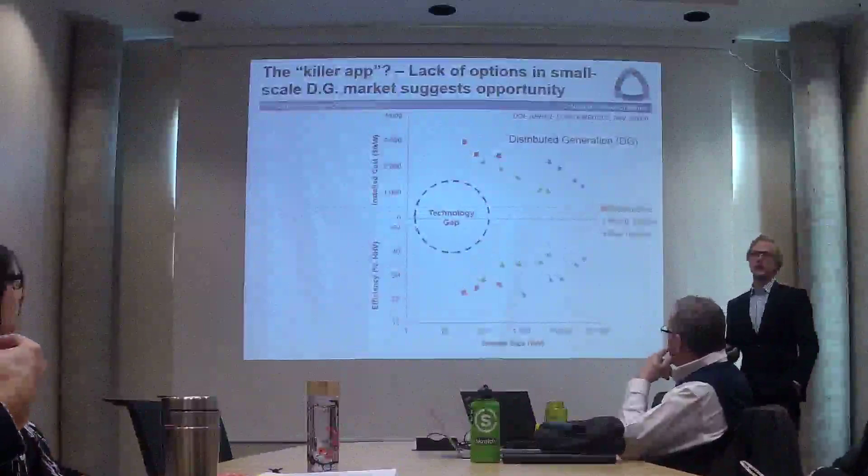So where did it all start? About 3 or 4 years ago, the Department of Energy was trying to fill a technology gap for small-scale distributed generation, meaning small generators from 1 to 25 kilowatts. The problem is there is no cheap generator and there is no efficient generator. So the goal with the protonic ceramic is to really fill that gap with an efficient, 50% efficient, and less than $1,500 per kilowatt generator. That would bring us to our protonic ceramic fuel cell that runs at 500 degrees C, which, for those who know what an SOFC and a PEM are, is somewhere in between - we're trying to take advantages from both low and high temperature fuel cells.

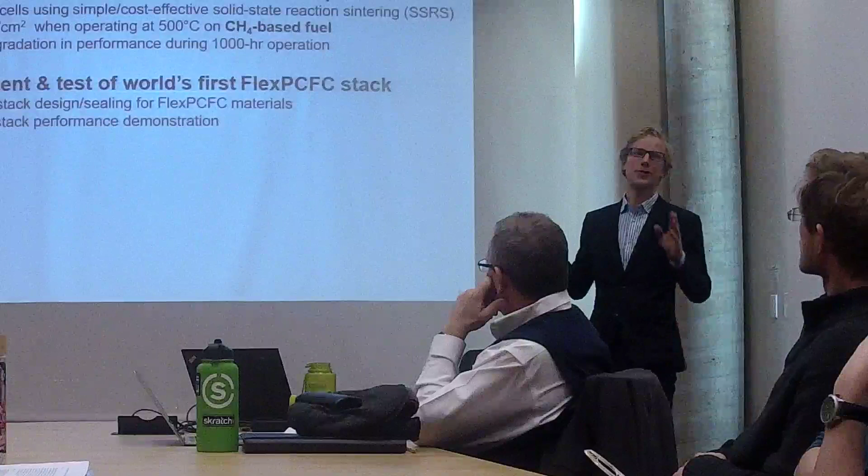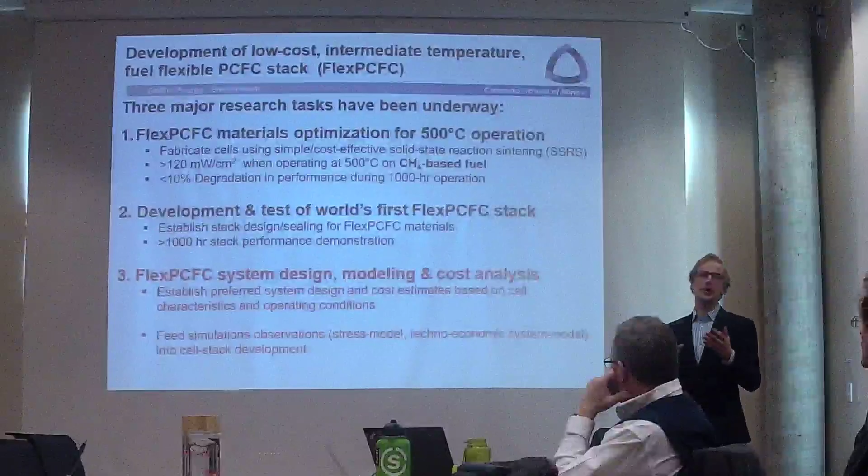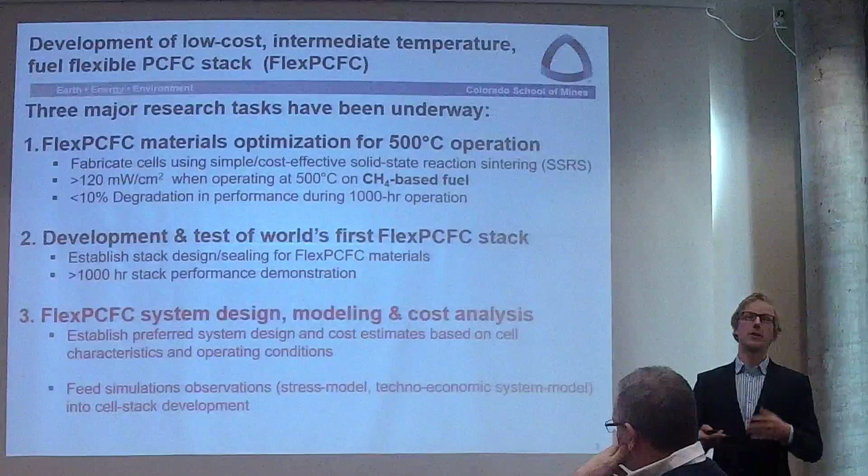The project itself was divided into 3 subgroups. The first task was led by Ryan's group and was looking mostly at optimal quarter-size cells that are as big as a quarter but produce about a watt - can make a small fan turn just by blowing - and putting it into a stack, which was the first PCFC stack made, or so Neil claims. Then the task I was part of, led by Dr. Brown, was mostly the system and fundamental results, going from a button cell scale to an actual kilowatt production system, and then trying to feed the results and observations back into the experimental groups, to guide them in their own research, from the perspective of the customer.

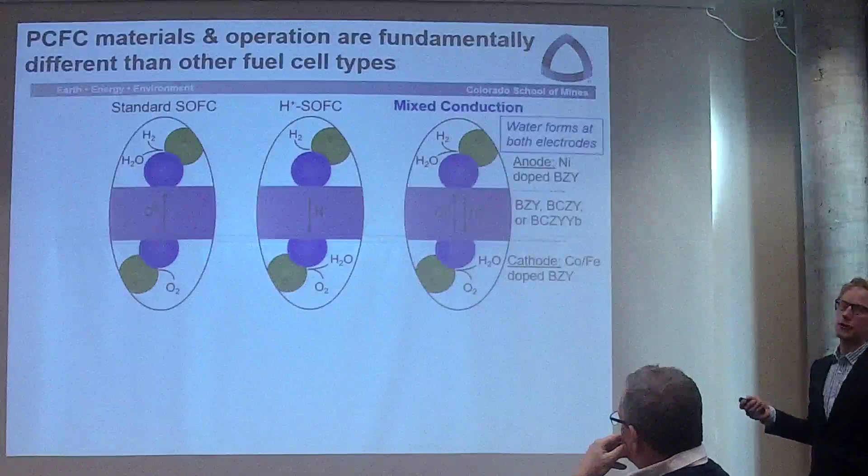For those not familiar with PCFC: protonic ceramic fuel cells use a kind of material that allows conductivity and conduction both of oxide ions, just like a normal SOFC, and also protons, as in a protonic SOFC. So our PCFC is a mixed conducting SOFC and basically conducts both oxide ions and hydrogen protons. Once we go from a button cell towards a channel, you see on the top side we have fuel going in, and then air at the bottom.

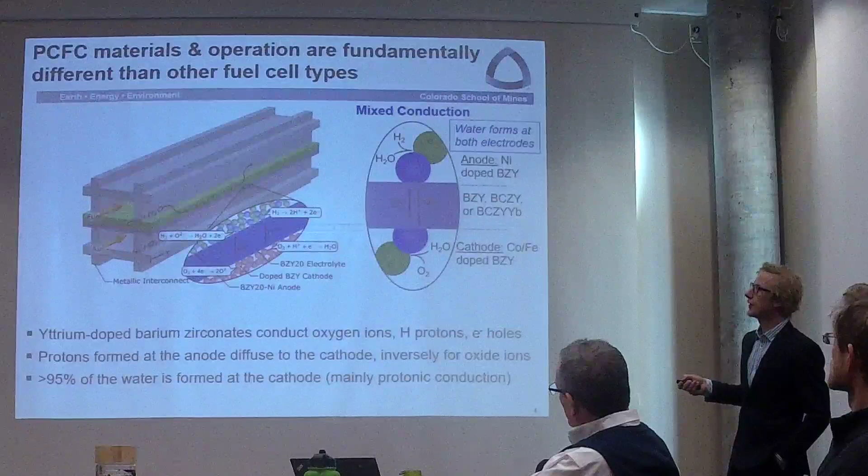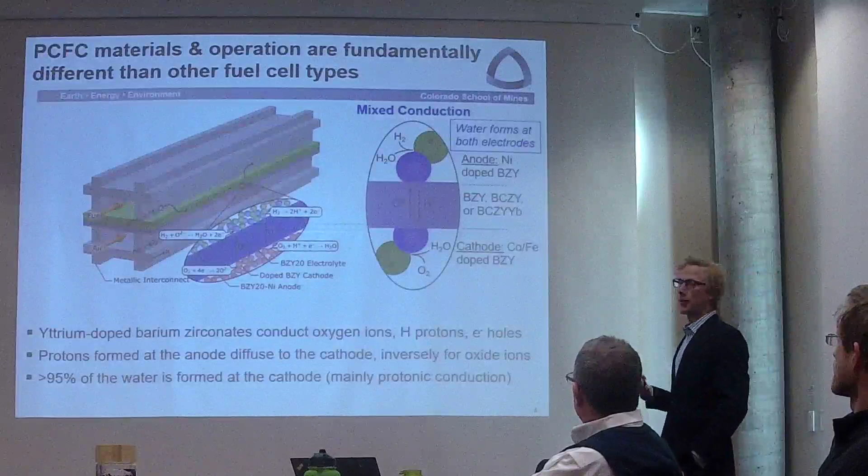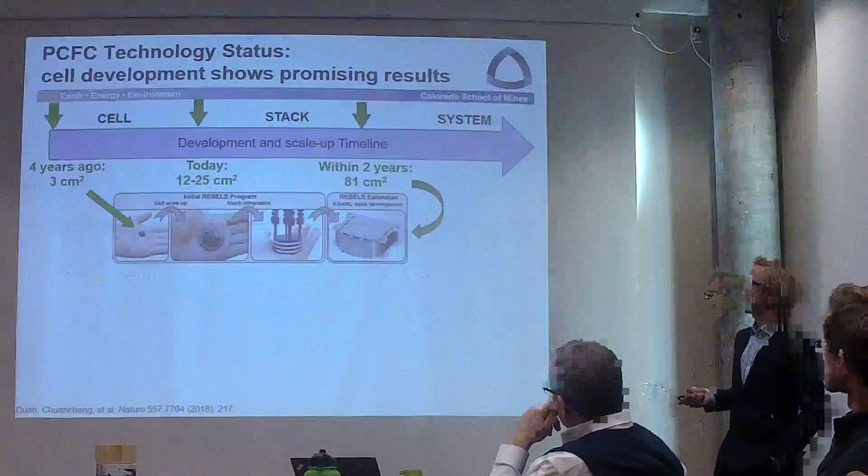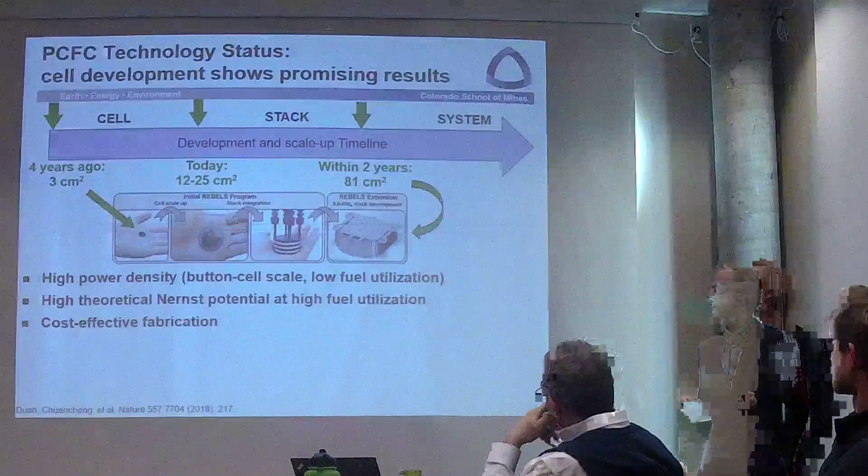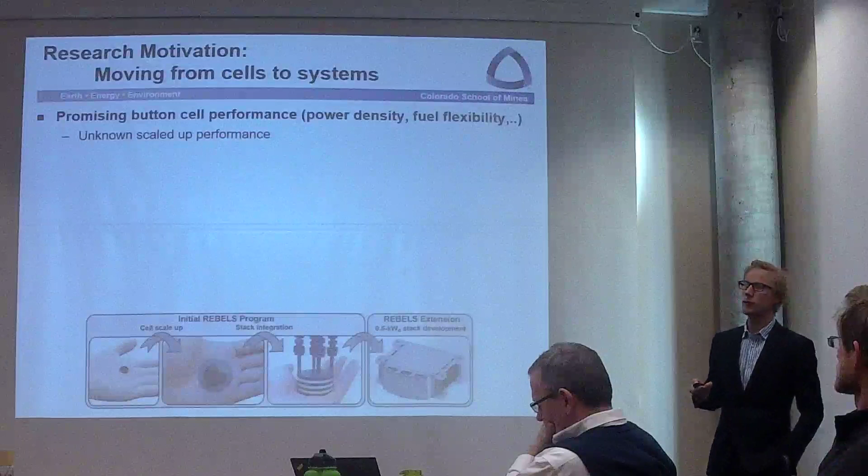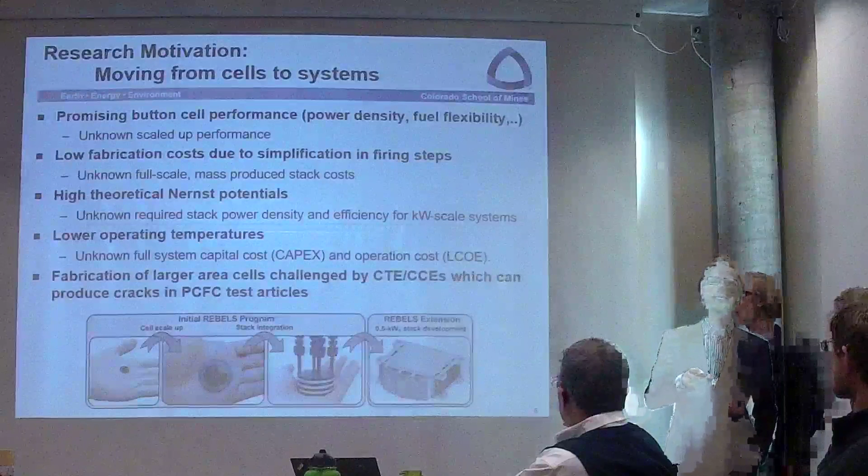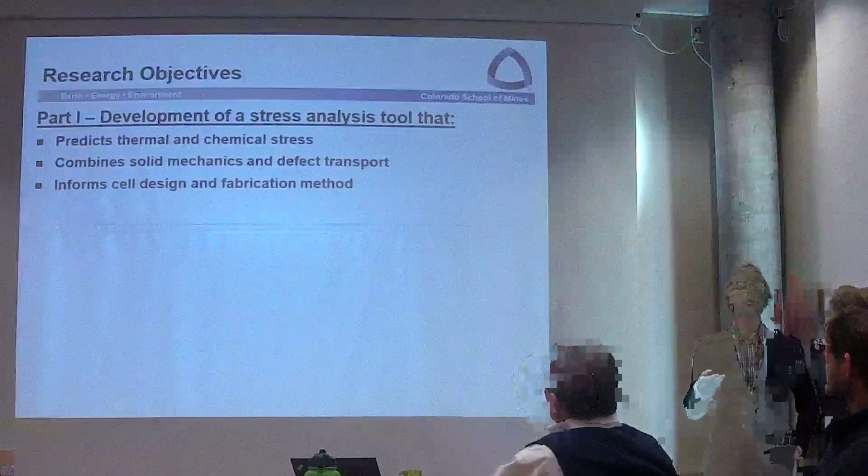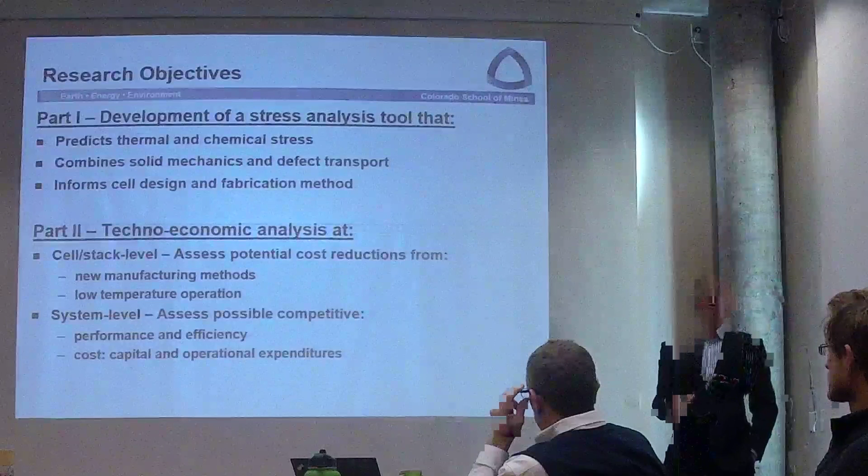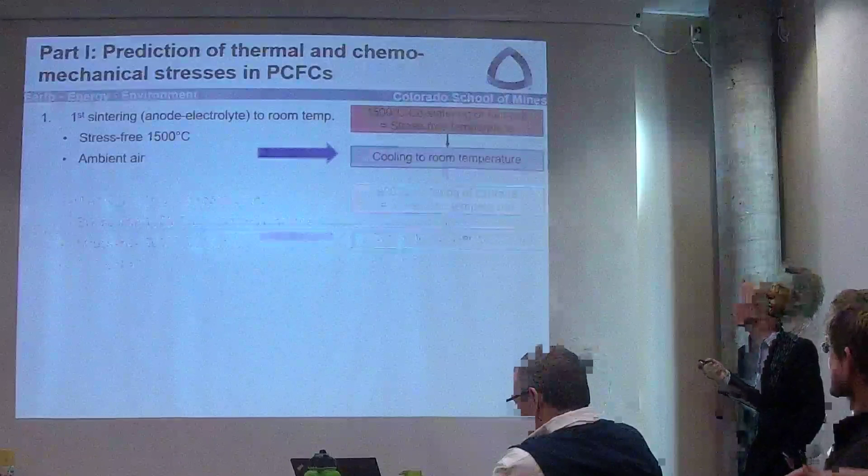And as we just saw, that cracking, the second key step is when you sinter down to room temperature, and then again the cathode cracks, or it could bring more stresses inside the membrane. And then the third critical step is once you start operating the cell.

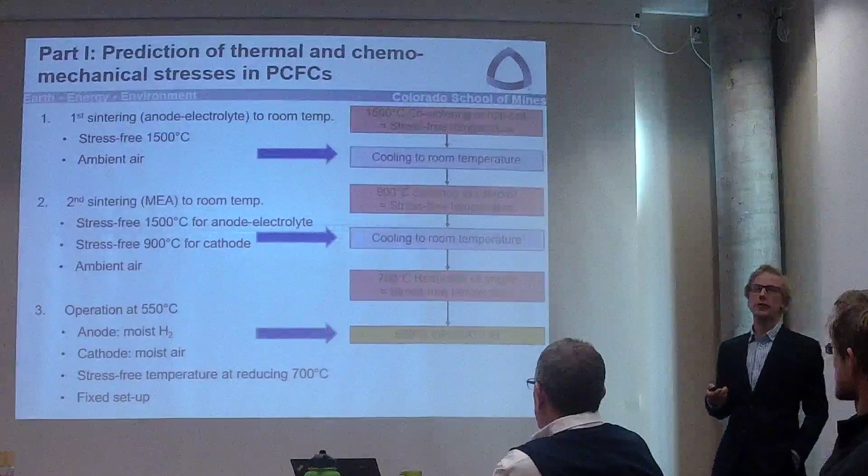So here we assume that at 700°C, when the anode is reducing from nickel oxide to nickel, the ductility of the nickel will release a residual stress, and so you go down to 550°C, and that's only at 150 degrees C delta T. So here the thermal stress won't be that important.

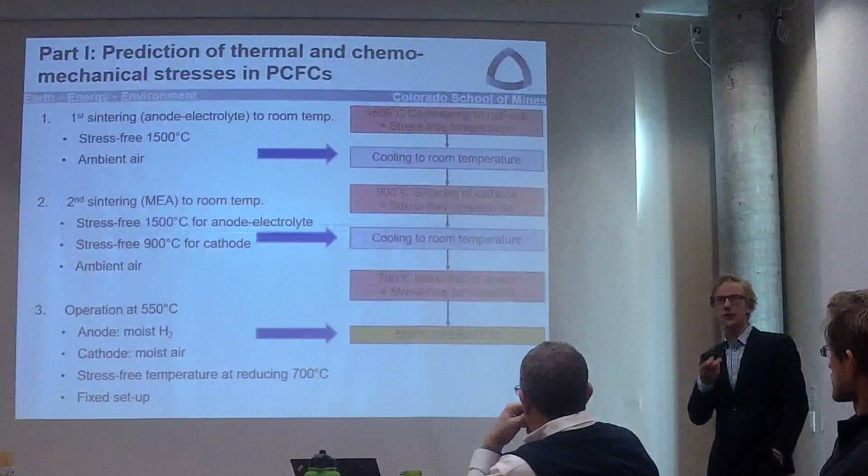And mostly it's the chemical stress. So how do those thermal and chemical stresses come about? Physically, how can you see the grain of a PCFC, made out of BCZ or zirconate on the left, and then you dope it with some yttrium, so you see on the right side. And so when that material is in contact with steam, here we have the chemical reaction.

And so how it looks like, you have the lattice parameter. And the lattice parameter is basically the side length of the cube. And you see that line, and then you see that this lattice parameter expanded because of the incorporation of protons. So it ranges across those different phenomena.

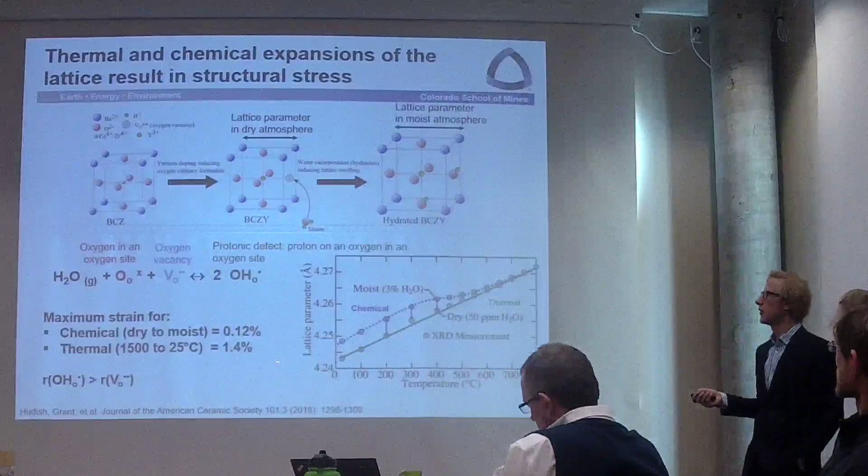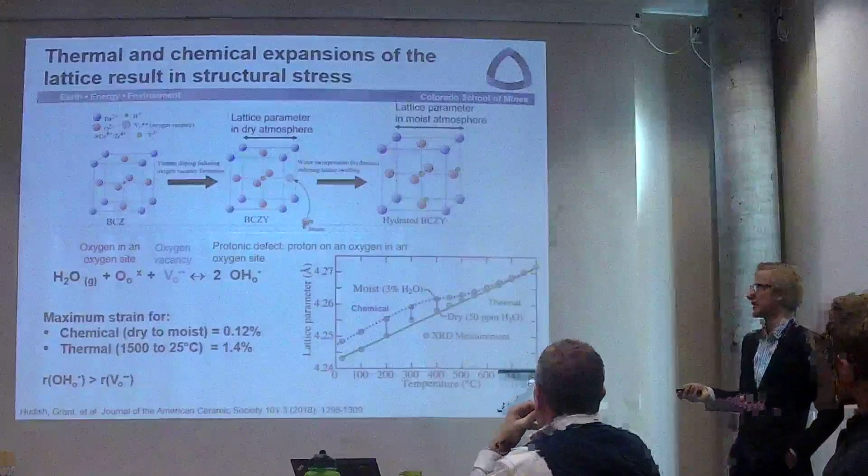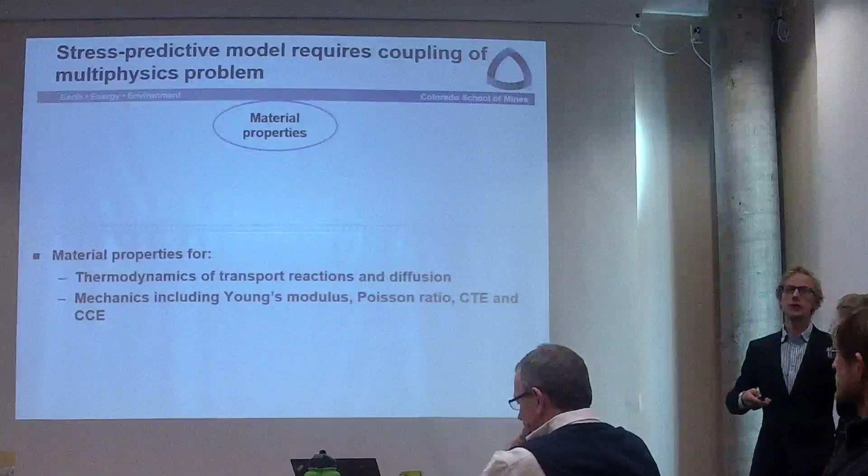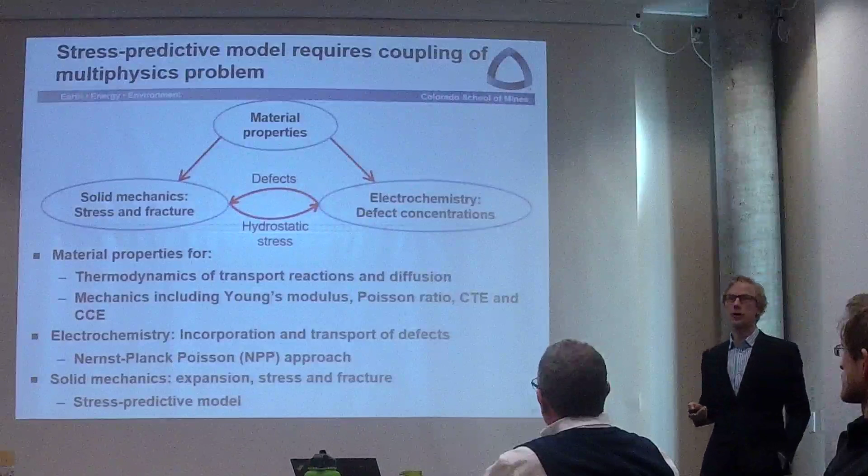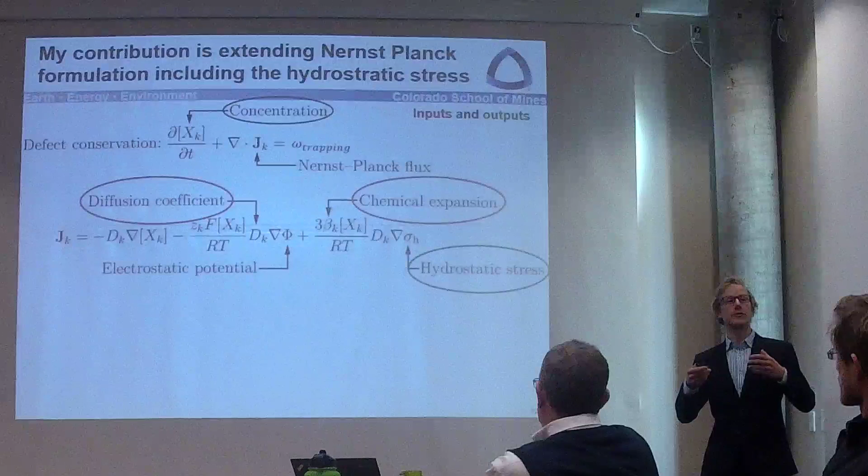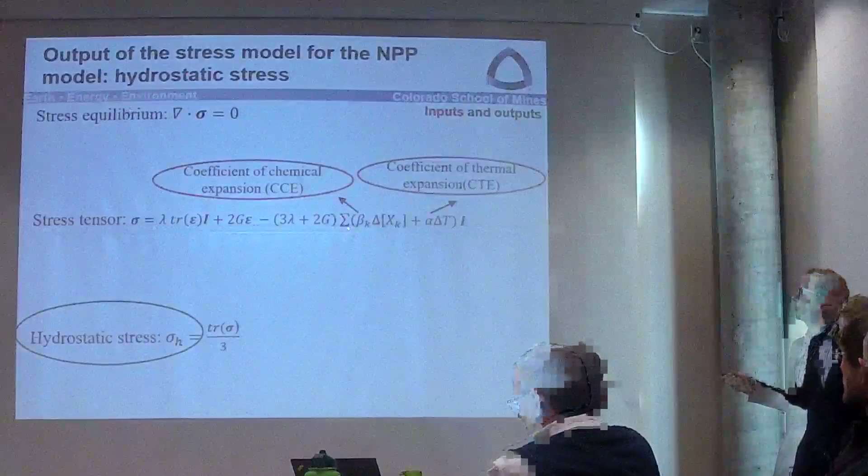So if you have a very high stress on one side because there's so many protons, but now to derive this hydrostatic stress, we have to look at the conservation of stress. And the next term here, this would be the chemical stress due to chemical expansion. The stress tensor trace divided by 3 gives you the hydrostatic stress, which is fed back into the Nernst-Planck-Poisson model.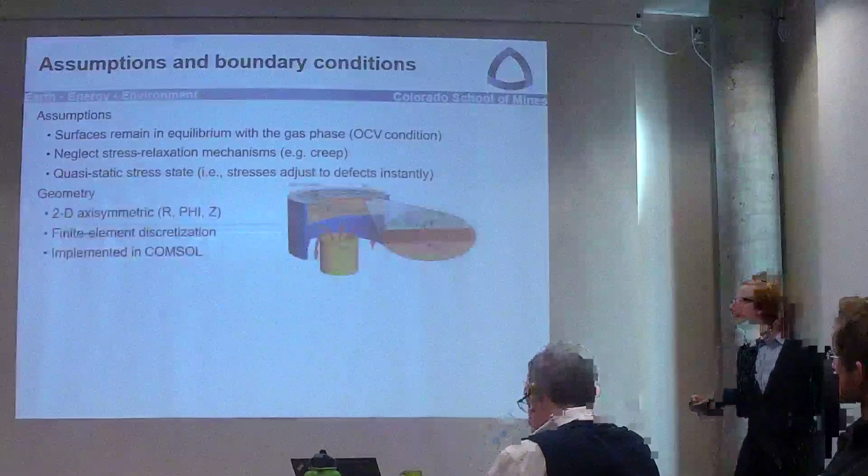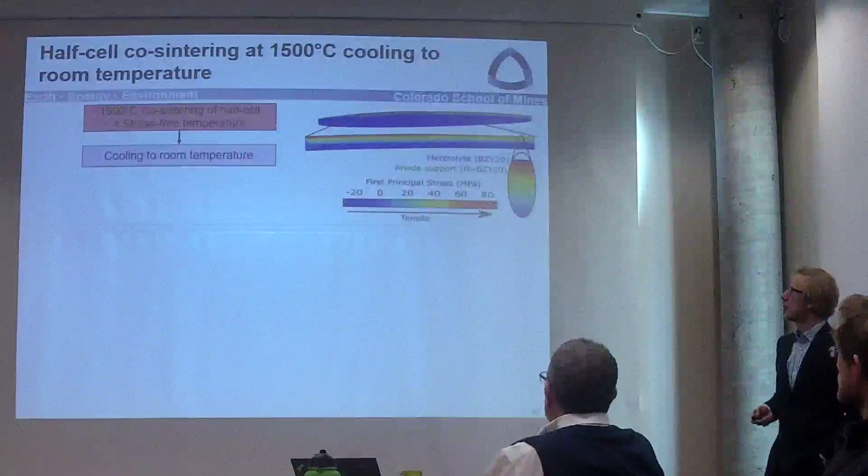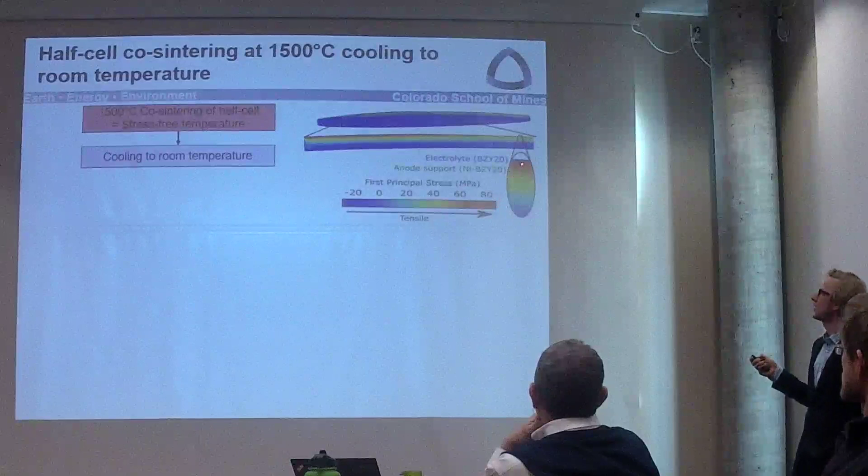We have a sealant. In fabrication, we assume that the cell is free to move at the bottom, and that way we're trying to match experimental data. So when we look at this little cookie here, which is the anode and the electrolyte, we cool it down to about 80 megapascal, and that 80 megapascal is really at the interface between the anode and the electrolyte. So how is that maximum tensile stress going to vary, and why are we looking at the tensile?

Very often they almost never break under compressive stress. So here the maximum tensile stress is at 80 megapascal, and at the baseline the electrolyte has a CTE of 10, which is a pretty big difference between both CTEs. Once you increase the CTE of the electrolyte, you decrease the CTE mismatch, and so the delta T of 1500 is going to have a much smaller effect, down to 20 megapascal, which is a huge difference.

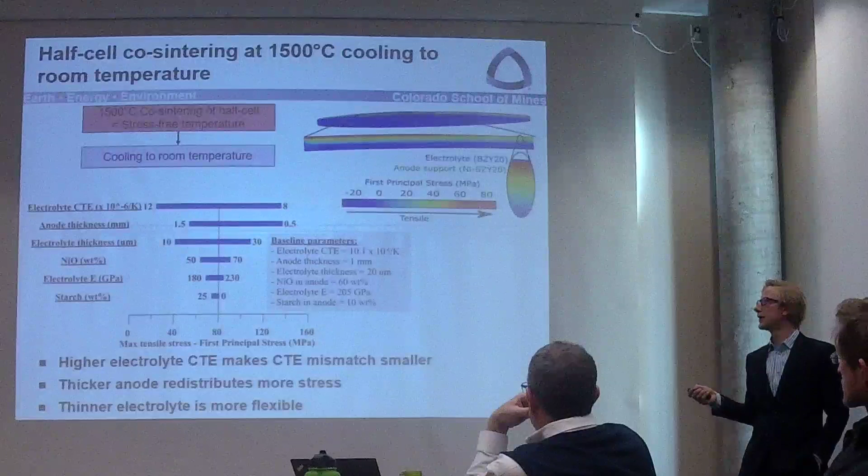This redistributes the stress over a larger amount of material, active for electrochemical performance. So once we look at the second step where we add the cathode, we see basically the same phenomenon counts, where again the CTE of the electrolyte is the biggest driver for those tensile stresses, and the PCFC can just play and make the cathode they really want to make - it's not going to matter much.

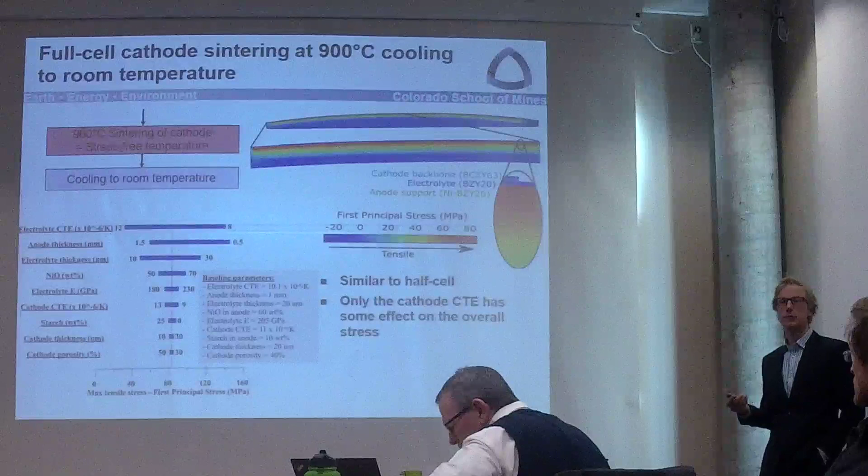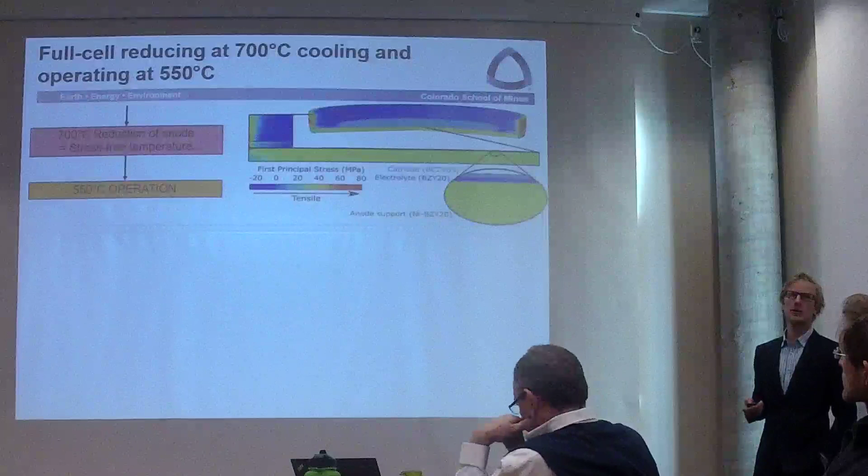If you look at the third critical step, once you're going to actually operate the fuel cell at 550 degrees C, we see now that the stress is going from 80 to now more about 40 megapascal. So it's about half. The temperature is now at 700, and you're only cooling it by 150 degrees C, so your delta T is 10 times smaller.

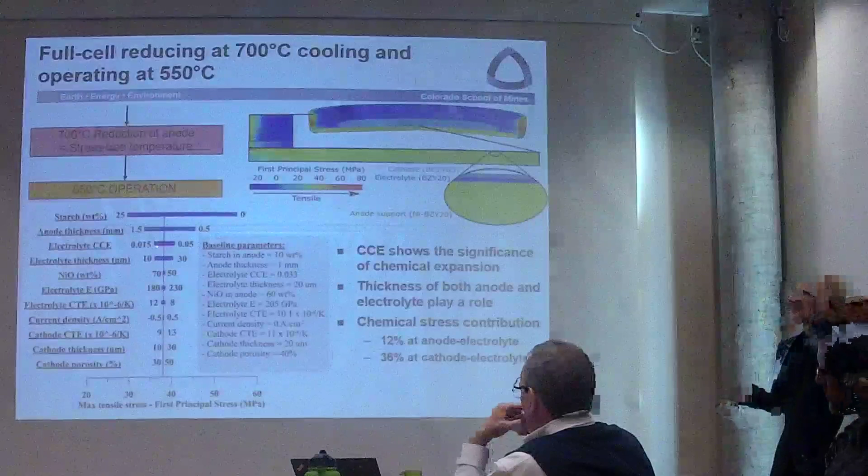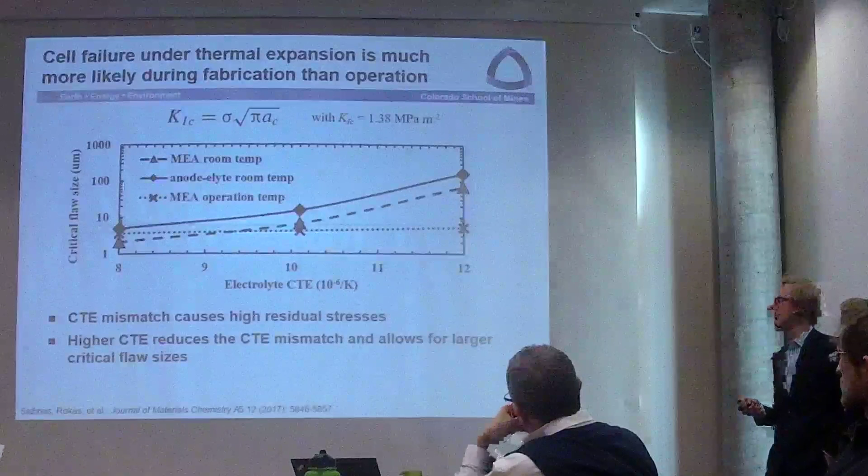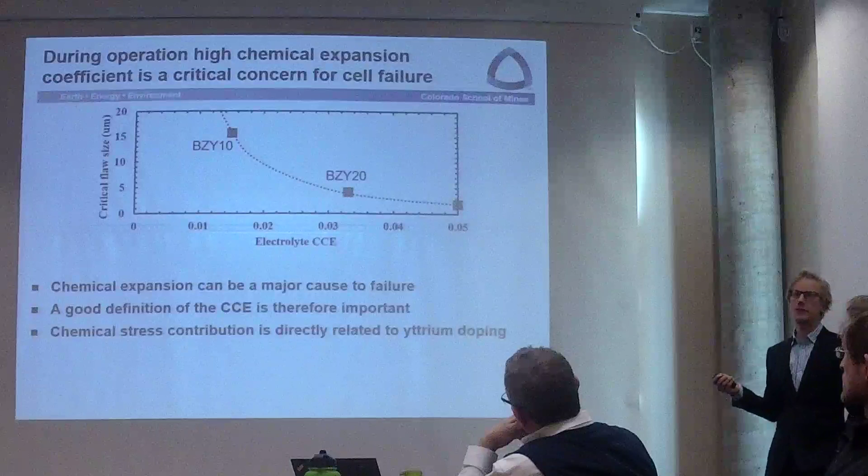So here when we look at the electrolyte CTE at the bottom, when we vary it during fabrication, the reason is because during fabrication your delta T is about 1500, so changing the CTE is not going to change anything about tensile stress. During operation, when we vary this chemical expansion coefficient, we see that the BZY10 coefficient is about 0.015, and the coefficient for BZY20 is about twice that. It would be great to work on the BZY10, but you have to know that BZY...

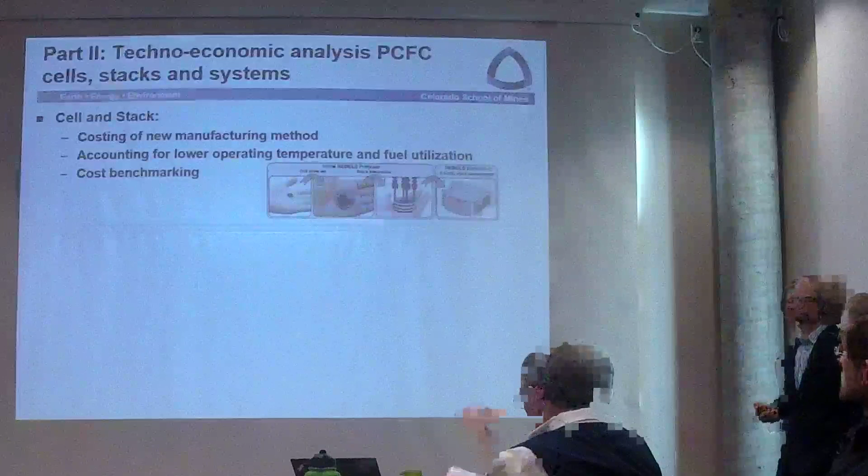So the idea would be to analyze how much is in process, and hopefully around it we'll be able to compare our predictions with those actual parts.

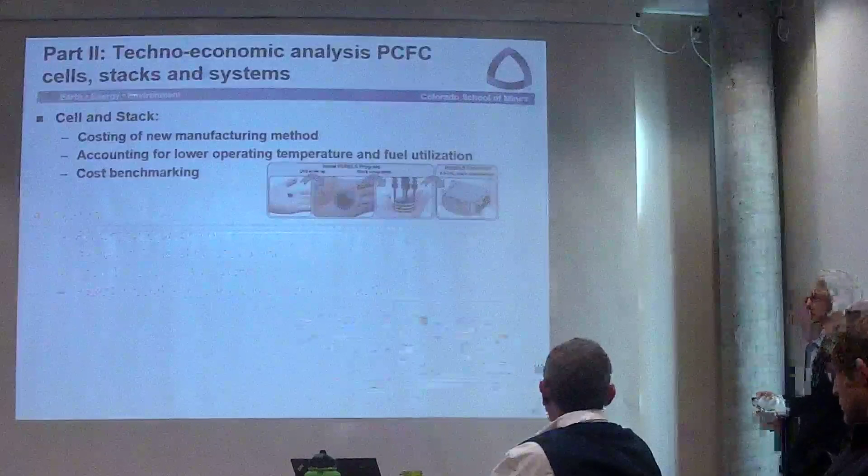Look at the system, and we try to predict how this whole system performs, looking at efficiency, but also operation cost - so is it more expensive?

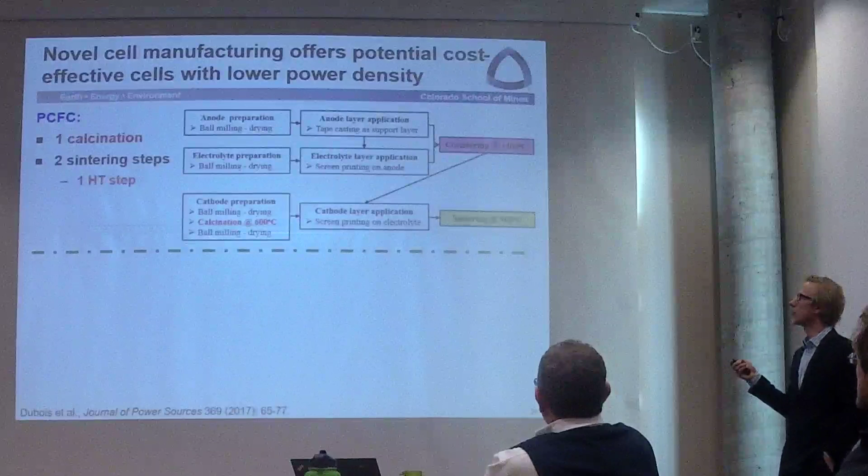We are happy to share that a PCFC running at 500°C with 150 milliwatts per cm² means that the PCFC on the left side needs to produce twice the amount of cells, but it's about half the cost.

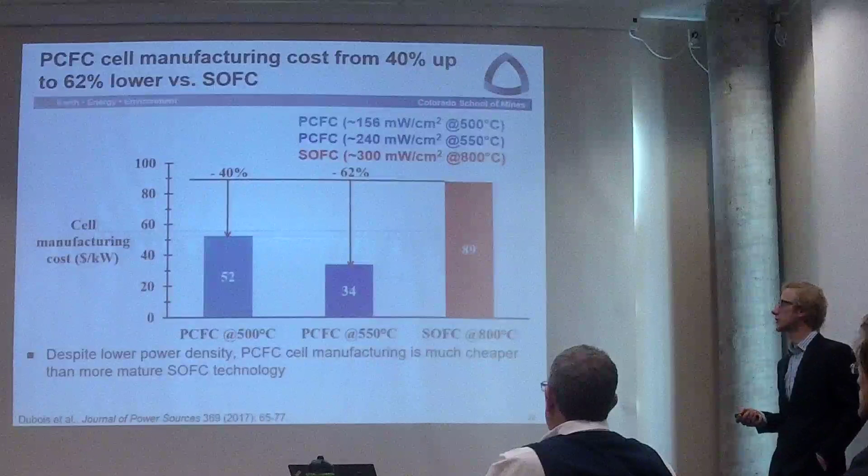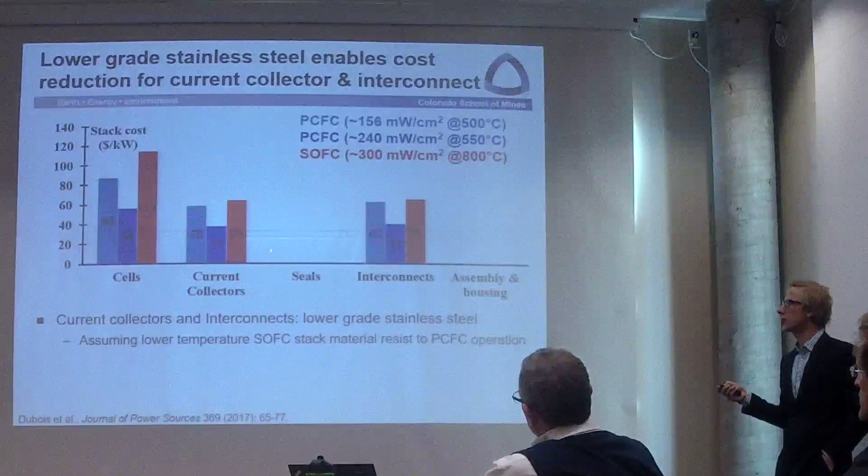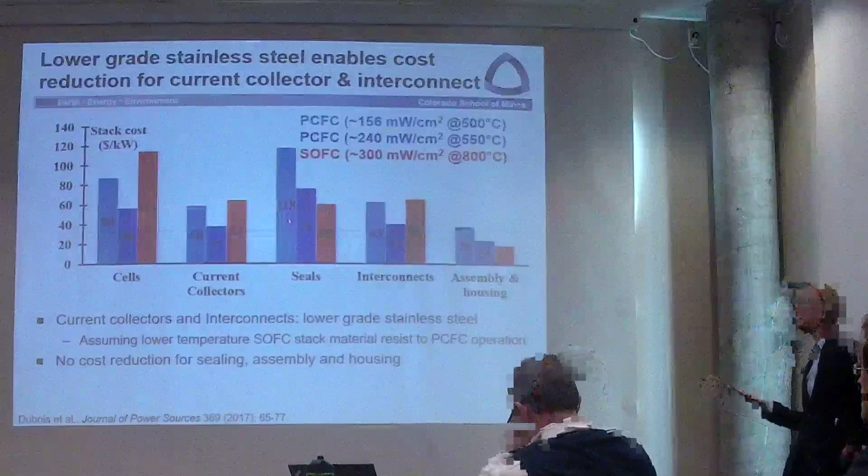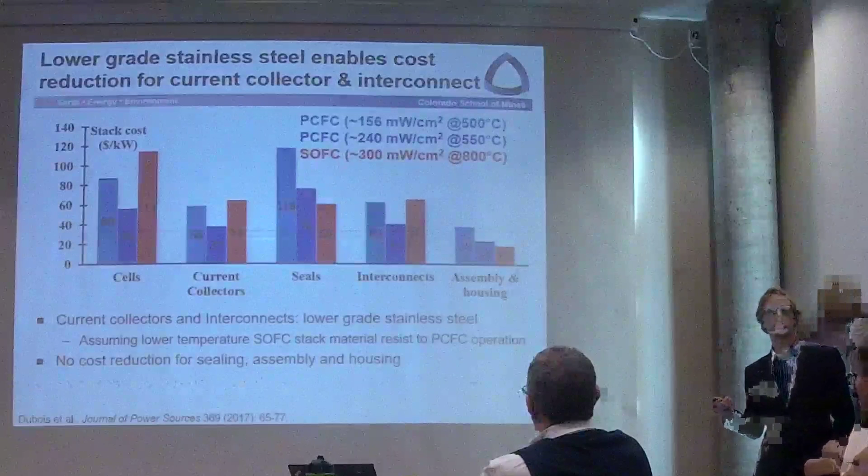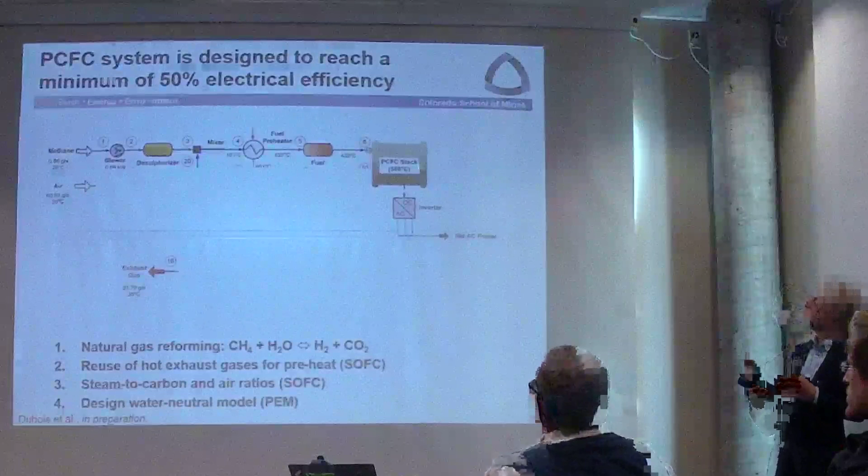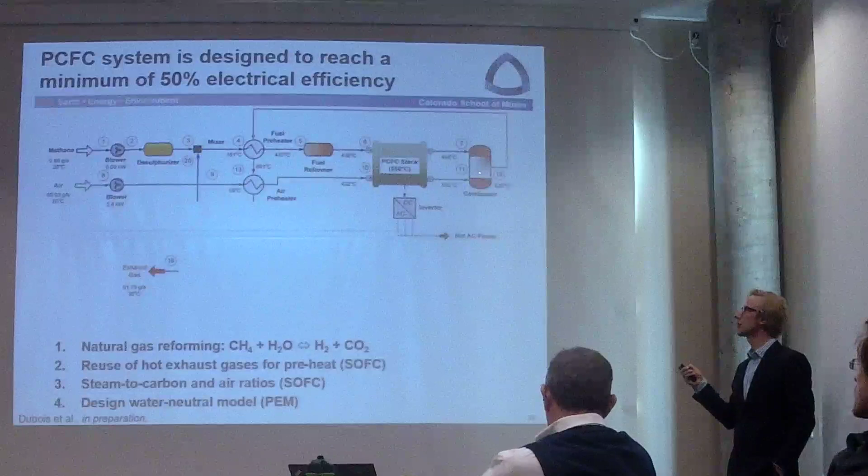So this stack runs on methane, and an inverter converts the electricity from direct to alternating current on the power grid. We feed it with methane, which raises the pressure, and natural gas allows for steam methane reforming through the membrane. Then it's preheated and gets to the PCFC stack, preheated again, and electrochemically burns to produce more heat, with air coming into the system. Because we want a water neutral system, we need to extract a given amount of water using a condenser while the system is running.

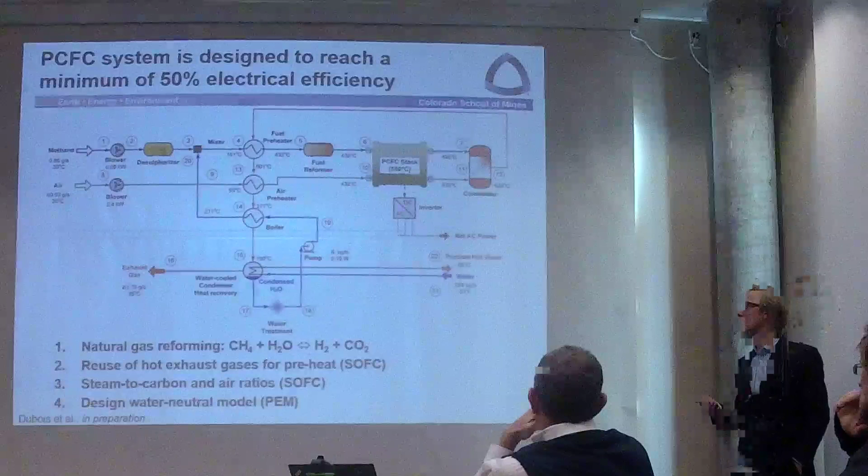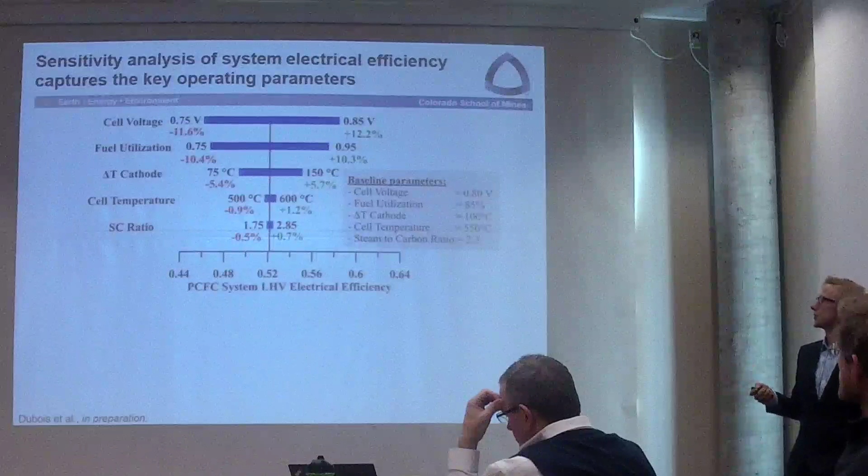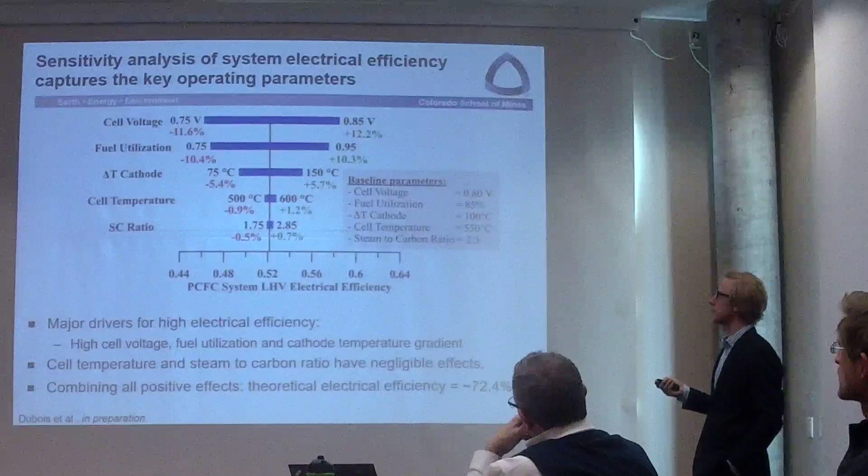Looking at electrical efficiency: this runs at 0.8 volts, 85% utilization, starting at a 2.3 steam to carbon ratio to prevent coking, which increases electrical efficiency by almost 10-12%. Combined, we get a value of about 72.4% electrical efficiency at the lower temperature of 550°C, with this cell and stack performance.

We're going to look at this over a 5 year period.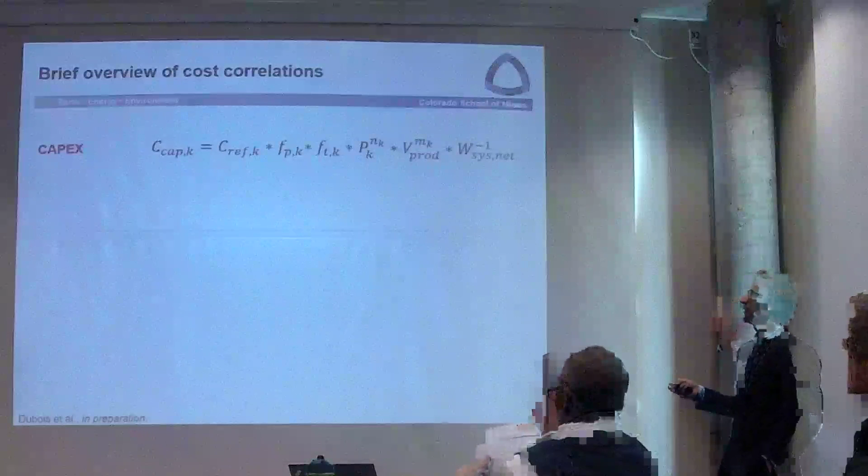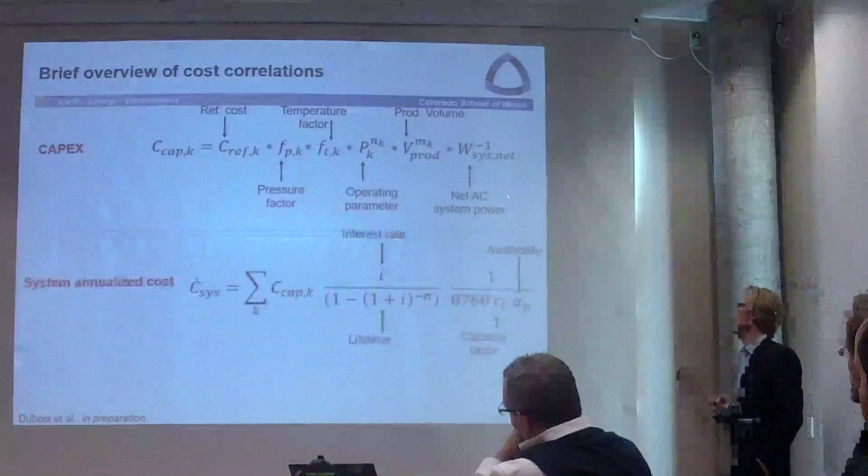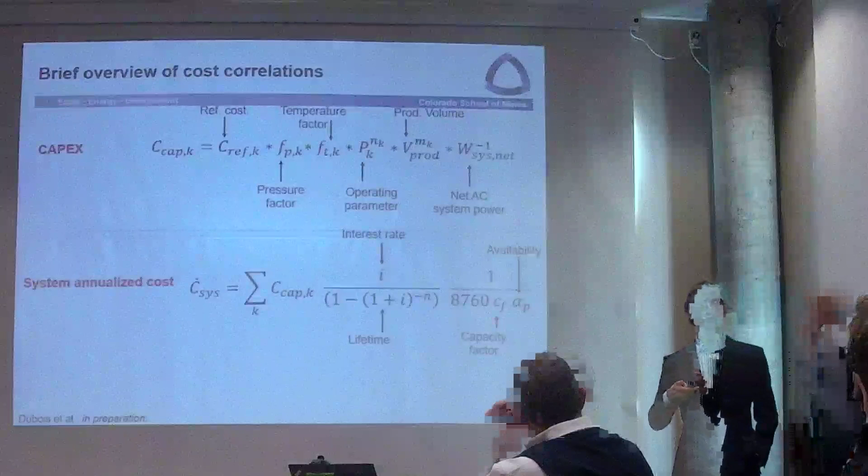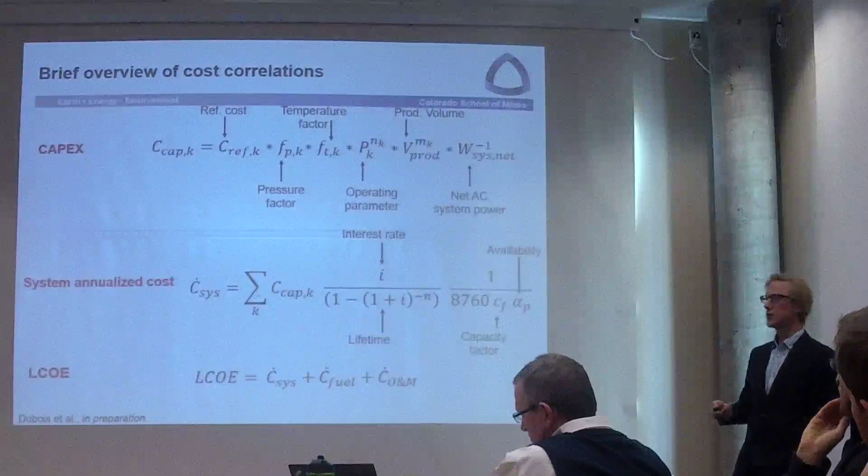Basically, there's a cost premium for high temperatures, adding about $10. Over time it becomes cheaper as we annualize the system using interest rates, accounting for the fact that it won't run at full power all the time. We take all that into account to analyze system cost along with fuel cost, giving us the levelized cost of electricity in cents per kilowatt hour, without the markup or profit margin.

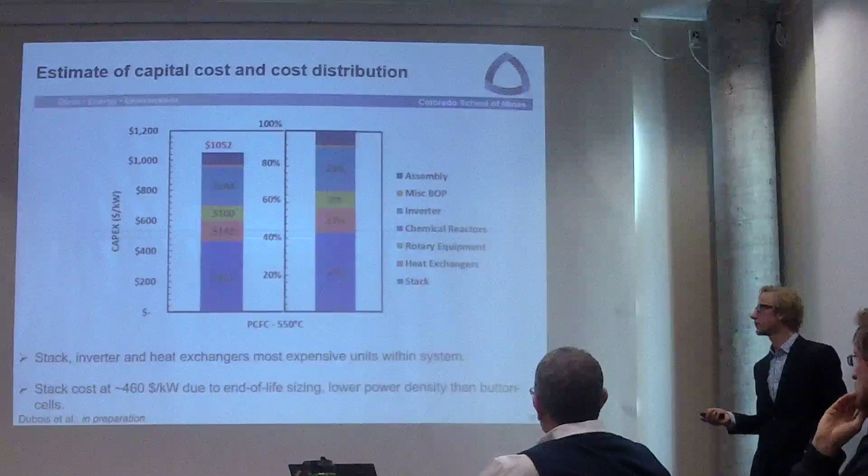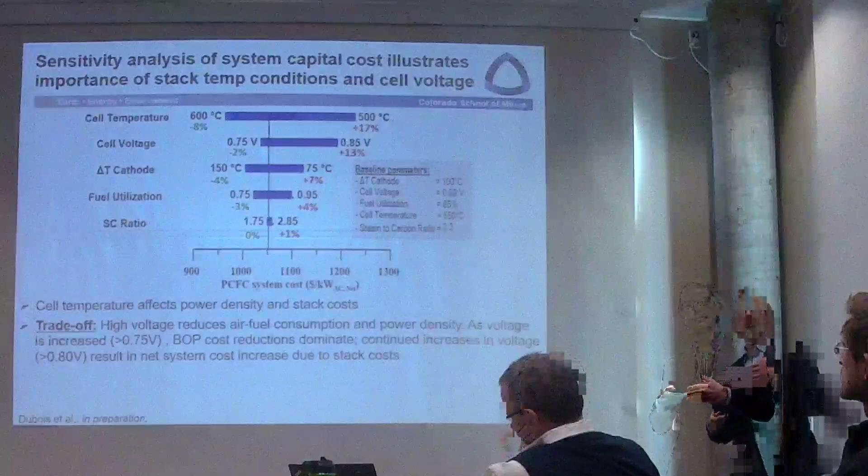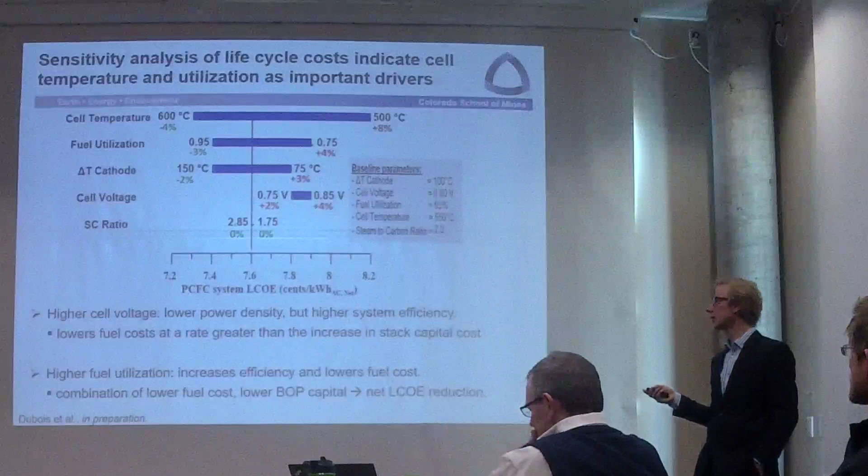The operating cost, reflected in LCOE in cents per kilowatt hour, only changes by about 4%, so it's not a major contribution. That was okay, it's good to cost this out.

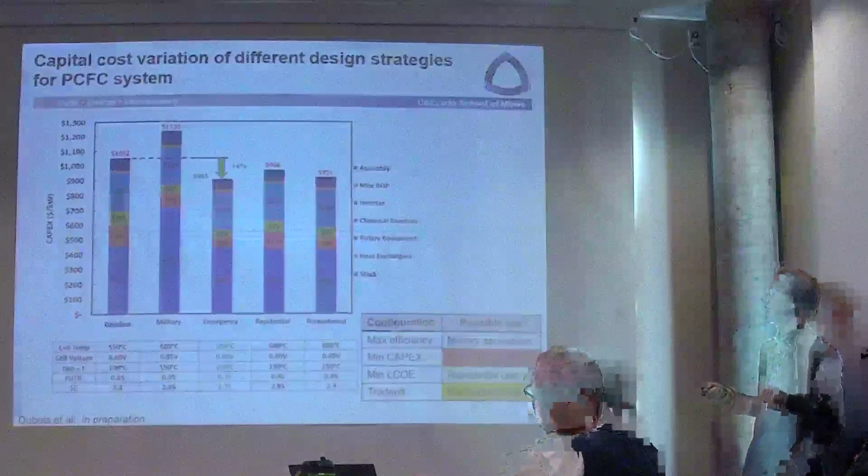Looking at what application this applies to: small backup generators benefit from the lowest initial cost for us, while for other uses where LCOE matters too much, high electrical efficiency drives down those costs.

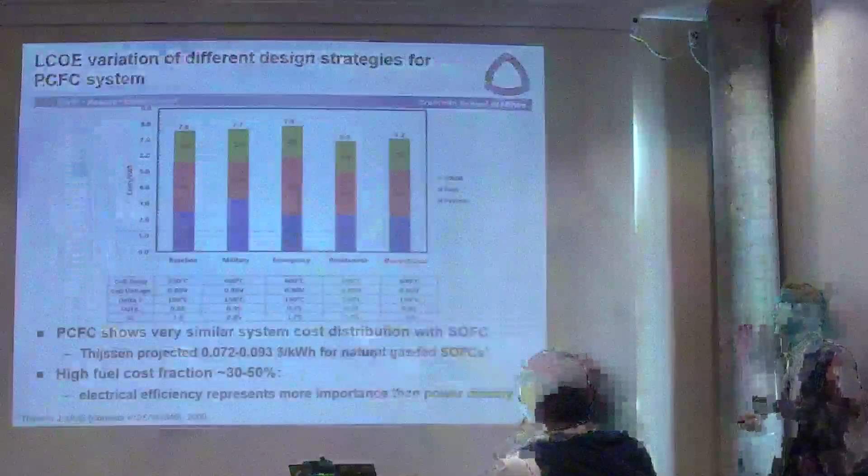Within LCOE costs, we are trying to look at development of the cathode, where adding porosity helps because of the phase boundaries, which allows for cost improvements as the system operates at around 70% efficiency.